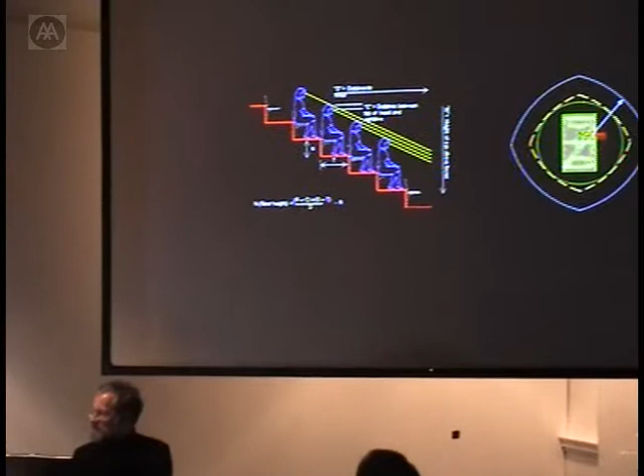And one of the first things I ever came across was a very simple little challenge: how high do you make the steps so everyone can see? Very, very easy thing. So I asked the partner in charge, there was I fresh out of college, and I thought he'll know what the answer is to this. And he said, oh, it's a big stand and you're quite a long way away, so they're about this high. Didn't really seem a very good approach to it, and you can imagine the embarrassment that you'd suffer if you got it wrong, not to mention all the court cases.

Fortunately, someone invented a nice programmable calculator, so I programmed out how to do it, and it seemed to work pretty well, I have to say. It actually worked them out for probably the first time anyone had actually done that particular.

Oh, that's very interesting. Complete blank screen. Oh, there we are. Very strange.

Anyway, after working it out on this programmable calculator and using it for major buildings, we're talking about seriously big buildings, I then did what most architects do about investing in design and technology and the process of design. I put my head in the sand for the next 25 years. As I say, the calculator had served its purpose, and I updated it all slightly in about 1989 when I went back to Lobb Sports Architects, and using MicroStation you could program simple things like how to draw a section of a stand, and it was basically you were putting in the parameters and it would draw them.

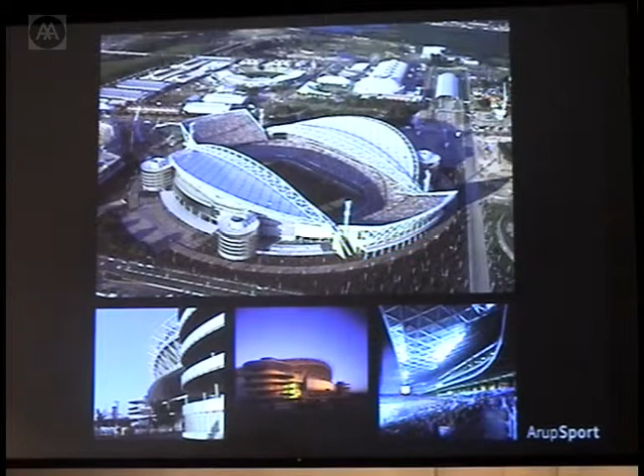Very, very straightforward, very, very easy, and at the same time discovered the benefits that working in 3D would create, not only for the process, but in the freedom that it gave one to design very complex forms. Stadium Australia you see here is probably quite unusual. The concept design, which won the first stage of the competition, was done by one person in 10 days, with 3 people to help for the final day. I suspect that won't be repeated for a fair time, that sort of approach.

So by the time I was involved as a consultant with Arup for the first time on the City of Manchester Stadium, I still enjoyed the overall process of design. You know, it's a thrilling building type, it's really exciting, plenty of enjoyment there. What isn't so enjoyable, and you'll find this about a lot of what you end up doing when you're working, is that there are a lot of things that are very repetitive, there are a lot of things that you can't do as well as you'd like to do them because you run out of time, and you can't necessarily go backwards and forwards to do them properly.

Now, stadium design, like all disciplines nowadays, is becoming very complex, it's very sophisticated, there's a lot that has to be taken into account. So the first task, obviously, is to start analysing those things that are going to give you the biggest benefit if you codify them, write your own software tools. And I've fixed, quite obviously, in the case of stadium design, on the basic geometry of viewing, the way you design a seating tier, the way you make sure you can see over the head in front, the way you make sure people can be close enough to the action. And the rules are actually quite straightforward, and they're easy to understand in this particular case.

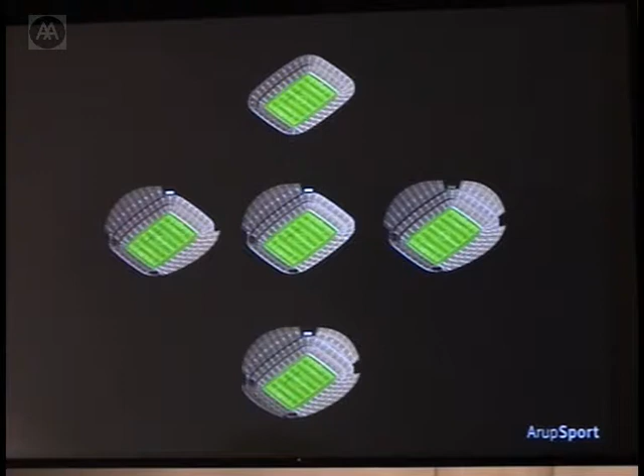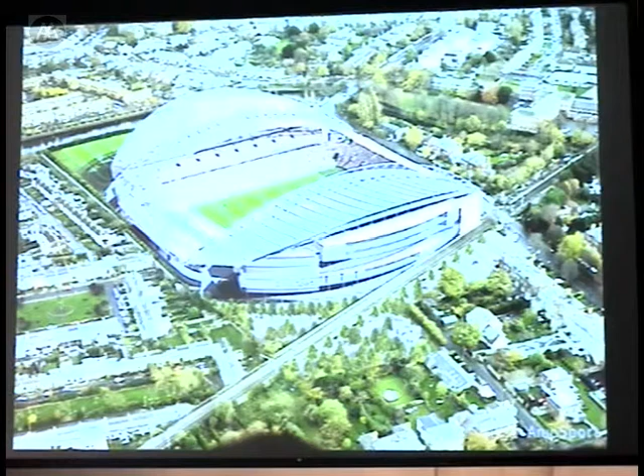Now, we progress beyond just doing the parametric design of bowls, because there are many other aspects that respond really well to being able to design the basic principles, codify the principles, and then create tools to build your design. In Beijing, for example, the complex bird nest structure of the roof and the external envelope, the very first stages were not done parametrically, but it was very quickly realized that it was such a difficult task to design this entire complex form without using parametric tools that we just had to go parametric. So we bought CATIA and we started off within Arup Sport a bit from scratch, and now it's all been done that way, and we're just waiting interestedly to see how far it goes through the manufacturing process. We're hoping that the subcontractors will actually have taken it on board and made it work for them as well. And overall, again, huge benefits.

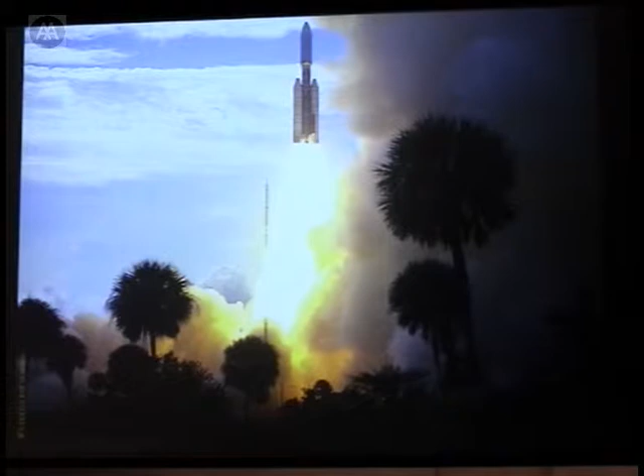I have to say I think I've been lucky in the particular field that I've ended up in. Those involved in it will realise quite rapidly that it's not rocket science for most of us. I suspect a couple at this table would have gone on well as rocket scientists, but for the rest of us, it's really fortunate that it isn't. And it's a field where even individuals can make a huge difference.

We are not at the stage where you had to be a giant corporation to benefit from this sort of approach. One individual can actually create tools that enable them to design stadia, as I have, or it doesn't matter really what. It could be the design of toilets. It sounds pretty mundane, but if you had to do an awful lot of them, why not work out what the principles are and create software that enables you to design those as well, more efficiently, more easily, and to examine more options and get better optimization.

It is, of course, and this is shared with all our businesses nowadays, a very competitive world. And so I have to say I dread to think what will happen to firms who don't follow this sort of route, because we found it gives us such a huge competitive advantage. In a few years' time, how will other people compete if they're not doing the same thing? But of course, it's no good just doing it then sitting on your laurels. We've got to constantly progress if we're going to remain successful.

What we need to do above all, I think, at this moment in time is extend the proportion of the design that's actually developed parametrically. As soon as we end up having to start making manual changes, we lose a lot of the power of these tools. So for instance, if we make manual changes here and the design has progressed to there and we want to change something, we very possibly have to go back and do all the manual changes again, which means we probably won't do it, and yet we'd have a much better building perhaps if we were able to do so. So our aim now is to spread the zone over which we can control everything parametrically as widely as possible.

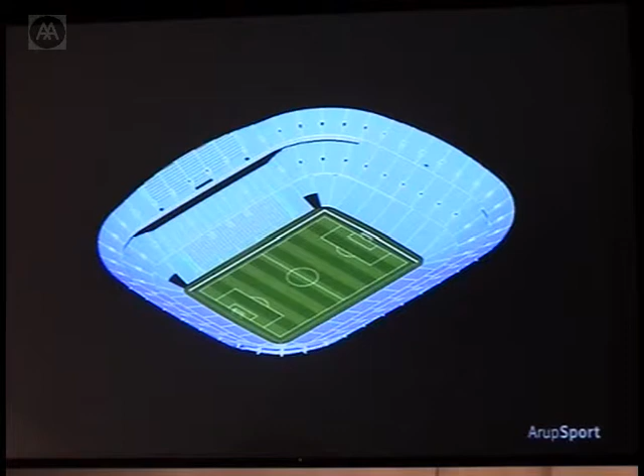This is actually the bowl for the new Allianz Arena in Munich. It's got 66,000 seats, I think it is. This was version 31 of 33. In fact, I think that it was finally 33 that got built. Imagine spending a month on each of those. Well, you wouldn't. It's quite simple. And here we have the reality, a slightly wide view of it. This is nearing completion, all designed parametrically.

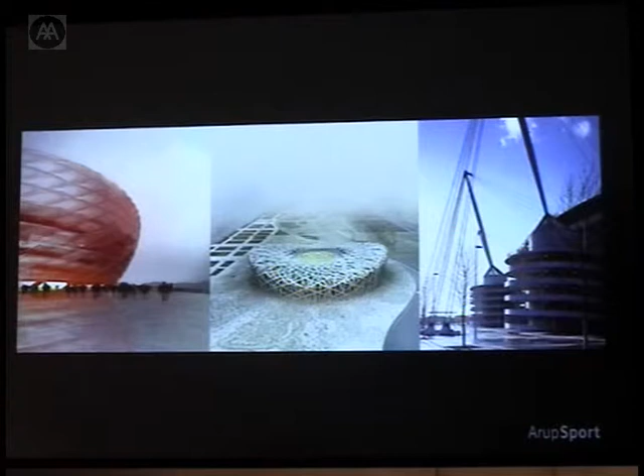So my dream is very straightforward. To be able to design a stadium in a day. All elements, all disciplines. And to do another one the next day, until we get the right one.

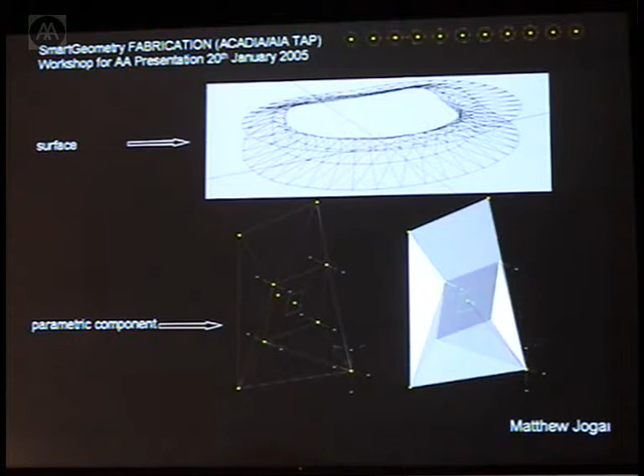Now let's have a look at some of the students' approach. Matthew Jogan from Yale started with a generative component which has got 4 root corners. And it's basically a set of fixed triangles which can deform themselves under a transformation. So you can see here how it deforms itself, and essentially what changes is the shape of the hole in the middle. But all the other components remain the same.

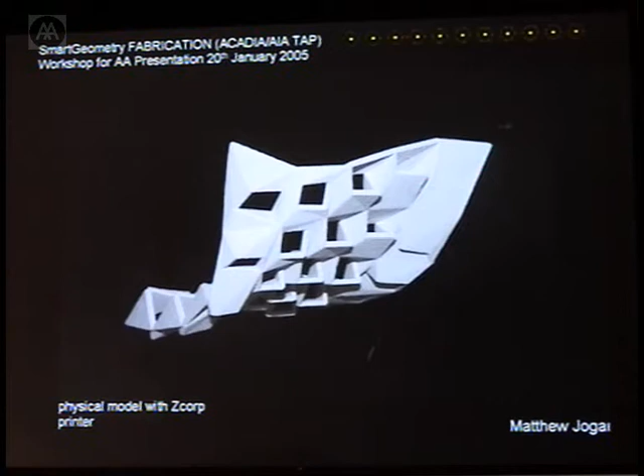And then you take that and you put it onto a design surface, in this case a B-spline surface, which you then dress up with these things. And of course they respond to the underlying geometry. So here you've got a piece of rather interesting geometry, which is essentially made out of 7 triangles which are dressed up. And of course, because we were doing it in a workshop in relation to fabrication, we also fabricated the components at the end.

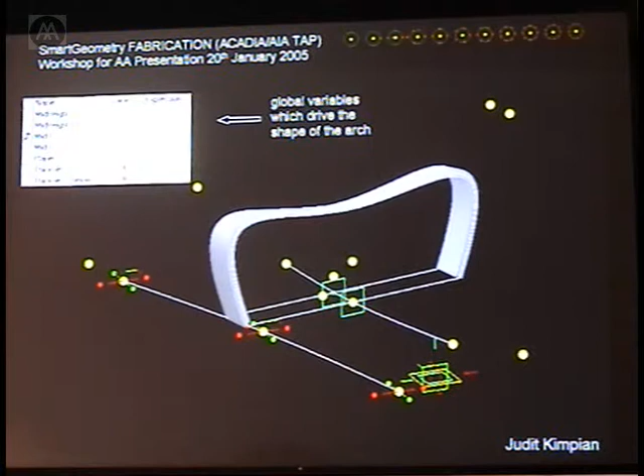Judit Kimpian, who I think is actually in the audience here, did a project that I think she said to me that she'd been working on for a long time and obsessed with for a long time. And that is this particular form. What this form does is that as you change parameters, you distort the form, so you have different types of layered objects which you can change the shape of by changing your parameters.

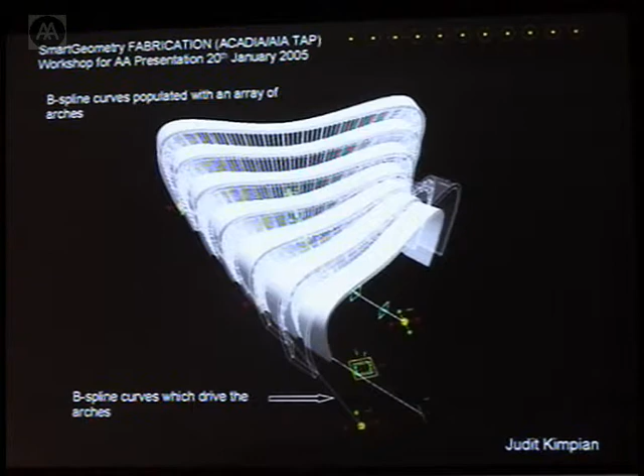But then, of course, the interesting thing is then to start to take those and array them out so that they obey rules which are given by things like the span and the fact that they each need to nestle into each other. And of course, as you move your B-spline curve around, the whole thing will distort itself and so on.

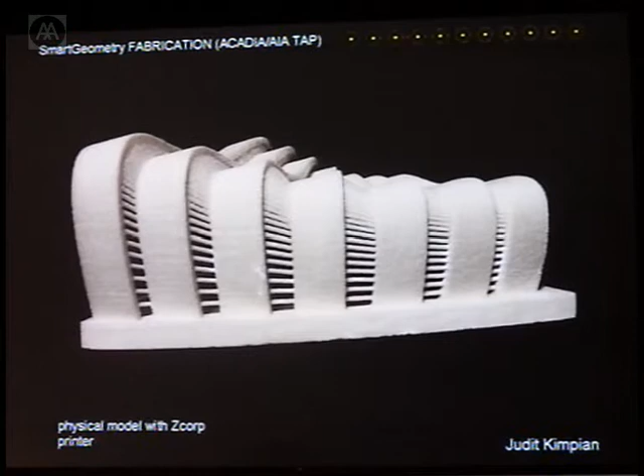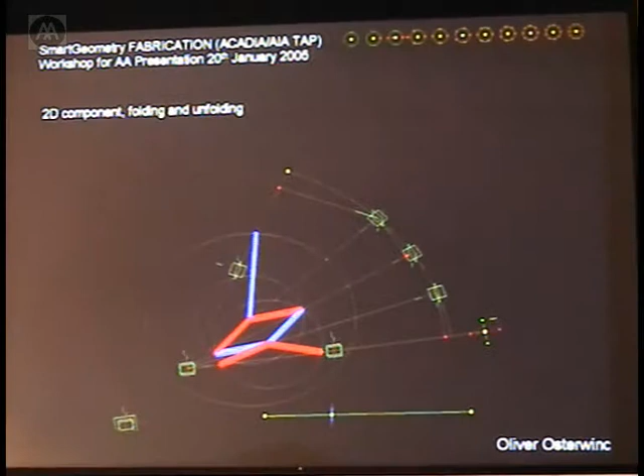Now, Oliver Osterwinc is really interesting because that's a different sort of problem. The Hoberman sphere, if you remember the Salt Lake City Winter Olympics, had a backdrop of a 2D Hoberman sphere, which was collapsed as the backdrop to the stage set. And what it does is it obviously moves, so this is the mechanism. Now, the interesting thing with parametric design is that something that is moving, which is essentially a mechanism, is trivially easily modeled in a parametric system. So it's a subset of parametric systems.

So here you take it and you collapse it inwards. You collapse it inwards again, and then you put it up into 3D, and of course then you get really quite interesting effects in 3D. Suddenly they're beginning to collapse themselves. And of course, in order to get all of this, what you do is you then cut it out to make sure that it actually works as a mechanism.

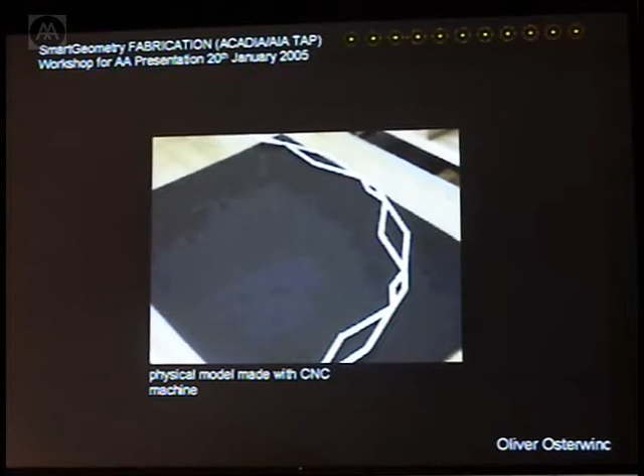Okay, and it just kind of reminded me of a project that we did a while back, which had an opening folding roof, which would have been quite fun to do. I think each one of those fins was going to be about 20 meters big or something. Whether it would have worked or not. The interesting fact is it was actually modeled quite simply as a circular object and then stretched in one dimension

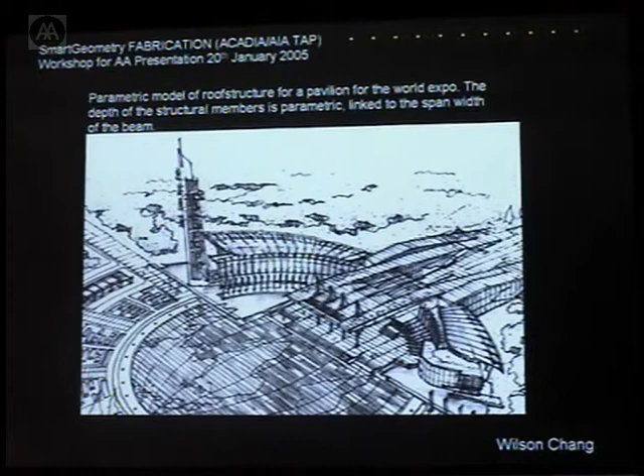to get the thing. This here is a Chinese gentleman who's working in Canada, who was doing a straightforward 3D parametric roof structure, not in itself, I think, in a terribly exciting form, but the nice thing about this sort of thing is that it integrates your manufacturing process, so all your cross-sections are laid out and they are laser cut straight from the 3D model. Change the 3D model, recut, re-erect it and reassemble it back to your form.

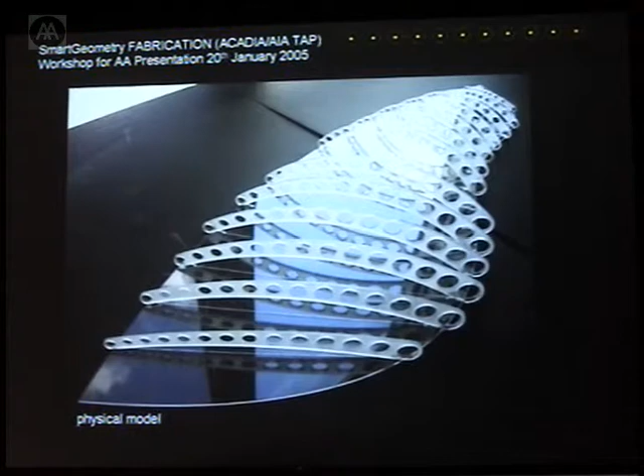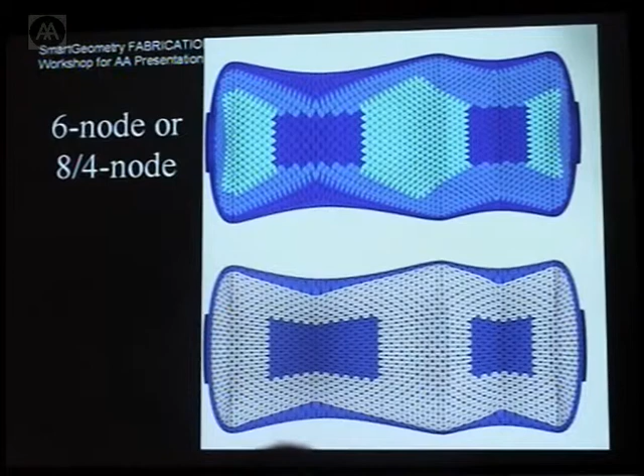Volker Müller and Rob Woodbury had a separate room, and they talked about architecture and more architectural type approaches. So Greg Lynn architects were there, and they often have this situation of having very curvy walls and objects like that. So what they do is build a system for extracting cross-sectional items so that you have different spanning objects. And this is the kind of situation where KPF has been using the same sort of things. Of course, things like how you triangulate the roof mesh and so on are very interesting and well worth exploring.

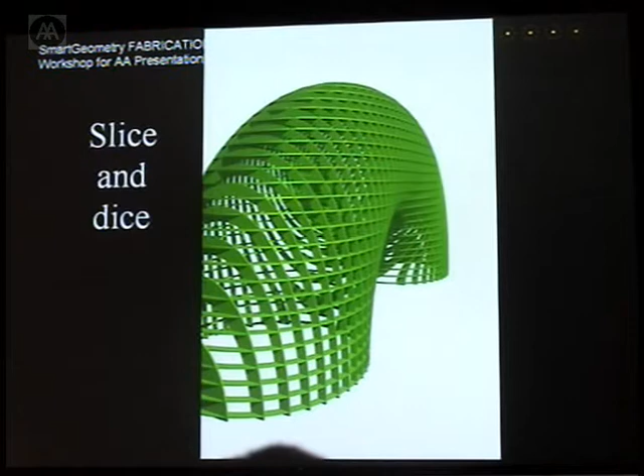And of course, you have the ordinary slice and dice thing where you just say, take a form, slice and dice, and there you are. And that's really very trivial and rather boring. I think everybody's done this slicing and dicing now.

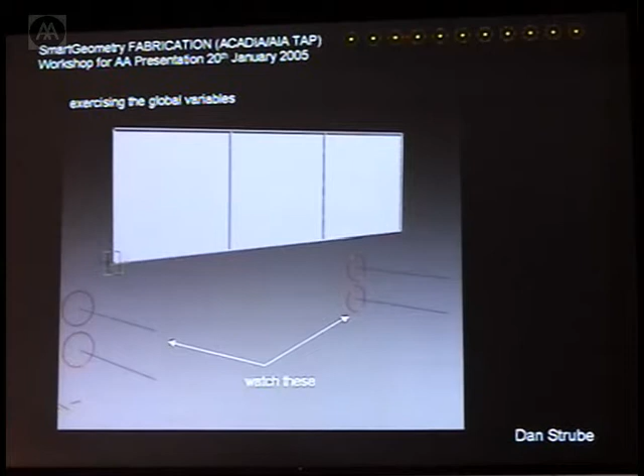Dan Strube was interesting. He had a truss that was deforming itself. And so he built a series of controls. So if you look at those global variables, you will see that those controls control the shape of the trusses at different ends of the object, so that you have a form that is gradually distorting and angling itself. His basic idea was that this was going to be used to respond to sunlight and weather conditions. And then, of course, what you do is you just dress it up, render it.

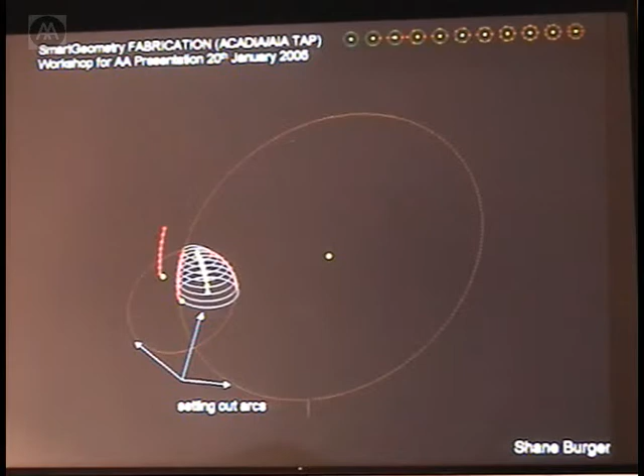Shane Burger is one of the competition, and they won the New York Times Metropolitan Interchange, and this was their basic geometry. They came up to the workshop. So we worked with our competitors as well in SmartGeometry Group. We're not exclusive. This looks like the GLA building, but as Hugh says, it ain't nothing like it. Its actual fundamental geometry is quite different. This is a series of inclined arcs in space, which are centered on the intersection of 2 arcs in space.

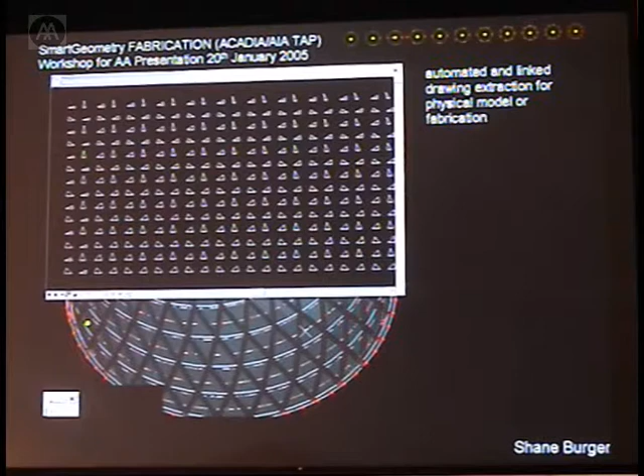And then you triangulate it. It has got a subset of triangulation, which is the triangulation of the glass, and of course you just lay them all out flat and they're all parametrically linked into the model, so when you change the model, all the layout changes. But the real reason they were doing this parametric model is they knew everything about the geometry before. That was relatively not trivial, but you could build it as a straightforward CAD model once you decided your 5 parameters. But what was problematic for them is the spiral ramp, the way the spiral ramp is going to junction into the space between those two structures. And that's really why they were exploring this.

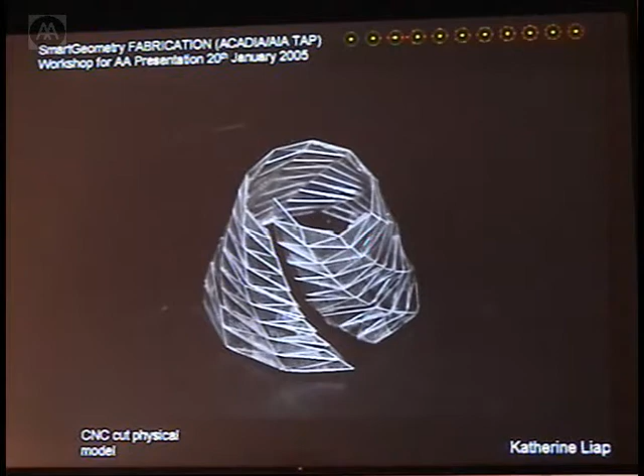Katherine Liapi was very interesting. She has been designing tensegrity structures, and basically she is working on providing a back-end entry into this. So what she was exploring was the formal methods of doing shapes that could be then dressed up with tensegrity structures. I'm speeding up now because I'm realizing I'm getting up to the end of my time.

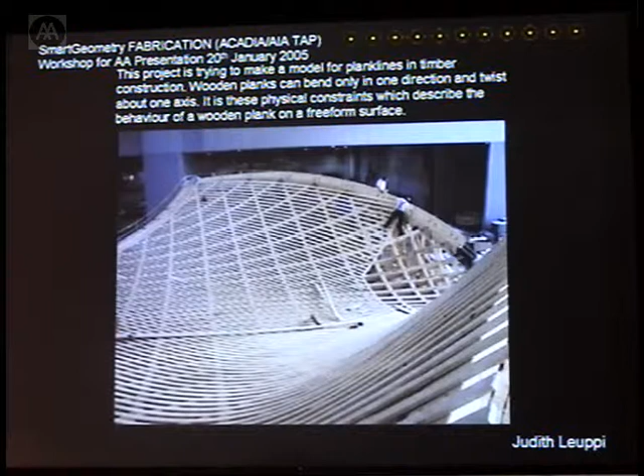Judith Leuppi from Arup, she has been into planking lines for some considerable time, and Bentley's helped to rewrite her planking routine. So it's now available inside Generative Components. So if you start with a double curved surface, and then this is the key item, if you take a plank and you bend it, because it bends unevenly around its 2 axes.

So when you put it on a curved surface, it is not going to take up the curvature you expect. It is not just the projection. It is in fact minimizing the normals, I think, kind of. But what it means is that after you built it, you then thicken it up and make it a plank. And you put it in the different directions and you have a look at it, see what it looks like.

And then, of course, you manufacture it. The real test, which Robert yet hasn't done, is to just cut them out and just stick them together at the junction points and see that it takes up the proper form. We're pretty confident it will work there.

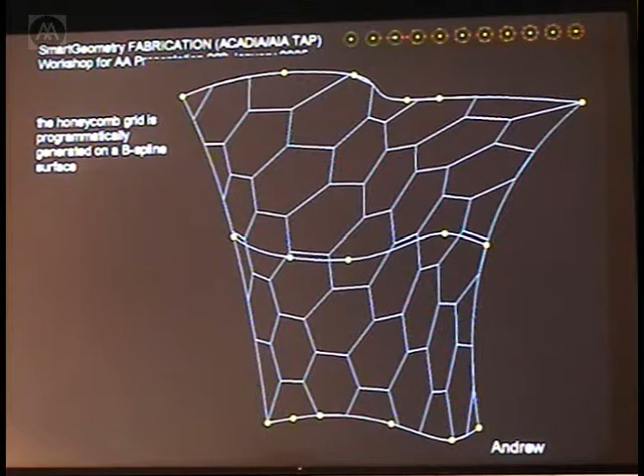Andrew Kudless, who is also here in the audience from the AA, he was exploring the fact that you can take code, existing code, and plug it into generative components in the back end. So he'd been building this, and I think he told us he went through 4 different softwares, Maya, Rhino, AutoCAD, and so on, in order to produce this. Whereas the nice, big advantage in generative components is it's all done in one single environment.

And of course, changing your parameter to have more honeycombs is not a big thing. Then you extrude the hexagonal grid, and after you've extruded it, you then lay it flat, and you cut it, and after you cut it, you glue it all together, and it will then automatically take up that particular form.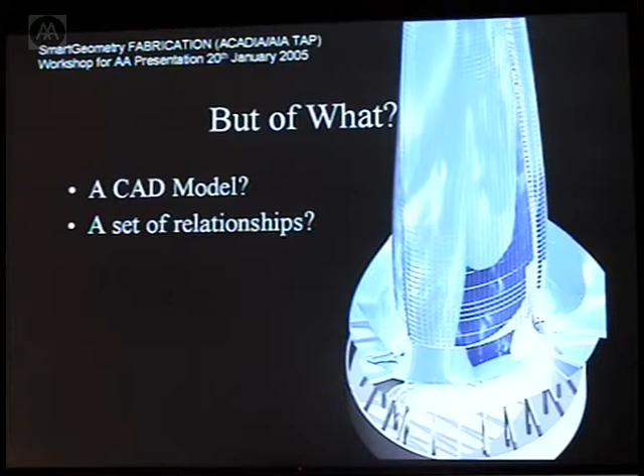This is where I think we're coming back to where parametrics really come in, which is that we're modeling relationships, not geometry. And modeling relationships, not geometry, is a skill that I think is going to need to be taught in schools and with architects. It is a vital thing that we have to do.

Okay, just finishing up. What we will do is we'll run another SmartGeometry event in November, and it will be in Cambridge in the UK, probably back to the Møller Centre, and we'll have a conference in London back here.

And what we're hoping then is to attract people, programmers and the like, also users of course, who are doing simulation type things, environmental simulation, that can feed back into the design of building systems. Because it's clearly important that performance is one of the issues that will drive form in the future. And we hope that GenerativeComponents will be a released product at that stage. And this is where I hand over to Robert with a minute to spare.

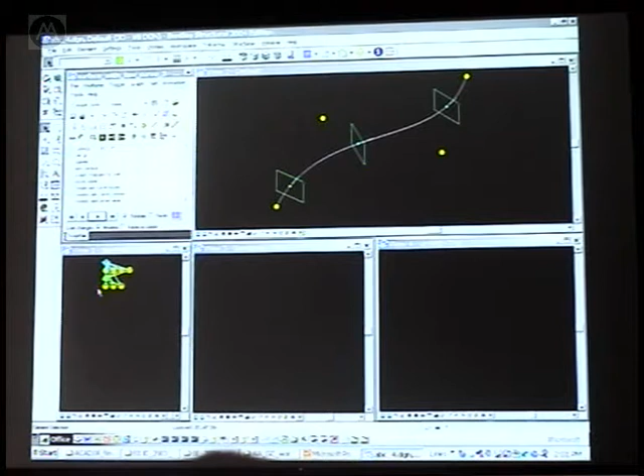So we're representing the relationships both spatially and geometrically and logically. So for example, I can pick up this point here and move it around, and I can move the planes on this curve. And all the data that I put down there is not just flat data. I'm not just snapping to something. I'm building relationships which are active, and which can be used to explore variation in design. Therefore, it's very important that I establish the relationships that are appropriate.

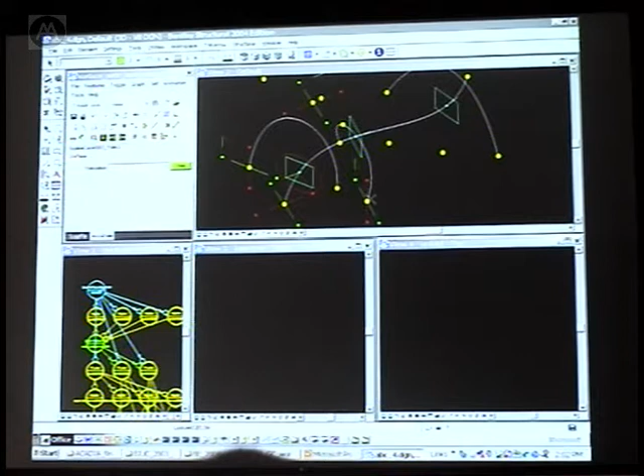So here I have a base coordinate system creating a set of points into a B-spline curve, and then a set of planes on those curves. So into those planes, I'm going to place some other points and other curves, so that, for example, I can pick up this point and move it on this curve, in this plane, and then pick up the plane and move it down the backbone spline. So I've got complete control over this system. Then I can put a surface through that and do various manipulations, for example.

One of the ways we want to explore design is through different paradigms of control. So, for example, it's pretty obvious that we can move something in the actual 3D model. But what I wanted to explore is the idea of creating other kinds of control systems, for example, to control the hump of this little saddle surface.

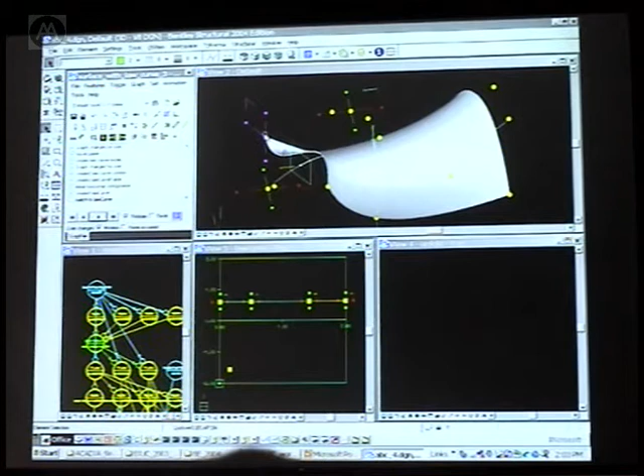So I'm going to create a law curve where the x-axis goes from 0 to 2, which is the length of this surface, and it goes from +2 to -2, which is like height, if you like. I'm going to put some points there, draw just a simple horizontal curve, and then switch over the control of this surface from the points in the three-dimensional model space to the law curve.

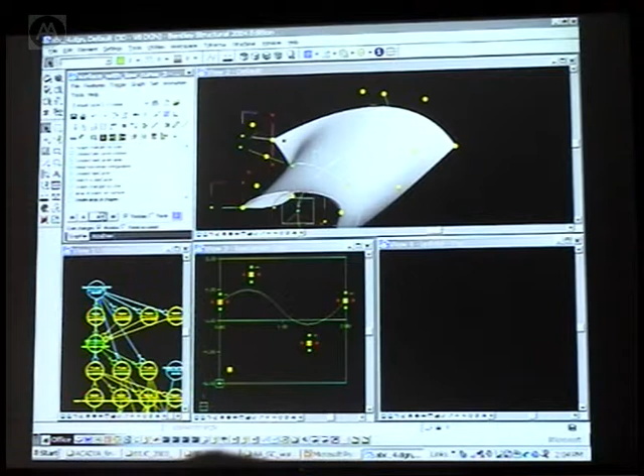So it initially starts off flat, and now I can go in here and change the law curve, and that surface can be manipulated. So in this particular case, I've got part of the controls, the height controls, being done by the law curve, but I've got other controls, like the lateral controls, being done in the three-dimensional model. I mean, this is just an example which I've built to show the principles. Of course, the whole idea is that one would adapt this to one's own particular needs.

Now I've arrayed a series of points, parametric points, on that surface. So, for example, the command to do that is just one symbolic node on this graph. Here are these points, and they're defined by a series in U and V. So create points from point 2 to point 8 in steps of 2. And of course it's actually produced all the data that's there.

So we're not going around individually putting down points or individually snapping to things. We're creating sets of objects which have relationships to other sets of objects, and where we're manipulating those relationships at a fairly high level. So now I'm going to switch off the surface. Shall we say this was on some roof, and I really wanted to have a beautiful doubly curved B-spline surface as the roof, but the client couldn't afford it or something, so I had to rationalize it.

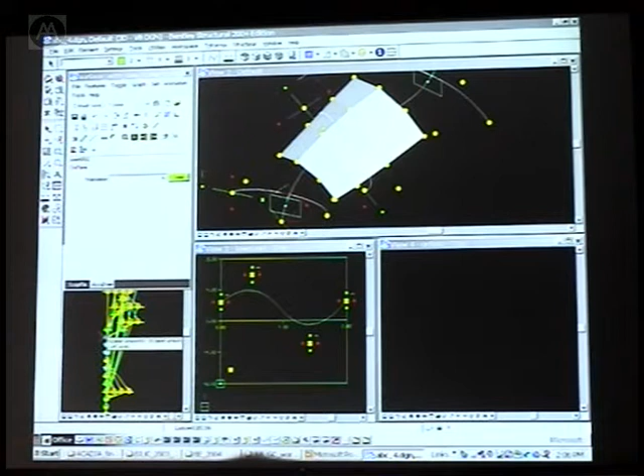So now I'm going to switch off the surface and instead put an array of shapes between those points. All those relationships are still maintained. If I move this controlling plane down the curve, if I change the underlying spline, for example, move that in, that is changing the control points, which is changing the surface, and we can see that the surface is highlighted in grey here, just to show that it's switched off. So the symbolic model is helping us navigate around both the data that is displayed and the data that isn't displayed. But even if the surface isn't displayed, all those relationships are being maintained.

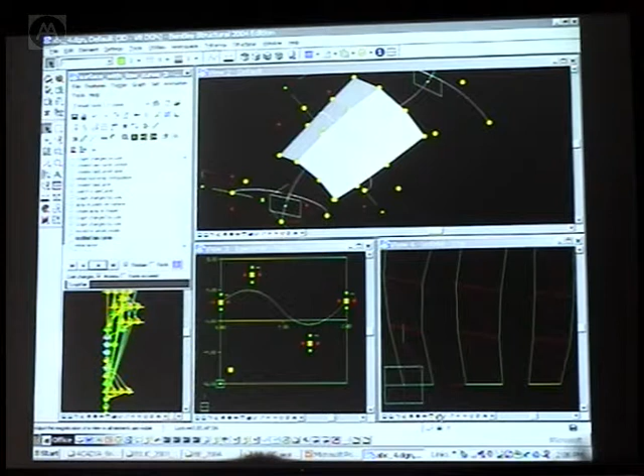So now I can create another model down here, and in that model I can actually unfold those shapes so that as I go back to change this design, change the underlying spline, that is rippling through, changing the surface, changing the points, changing the shapes, and changing the unfold. And of course we could send this to the laser cutter. Green would be the cutting power to cut the material, and red would just be scribing it. And then going back parametrically, we can modify the law curve, and then change the interval of the sampling of the surface and get a corresponding refinement of our manufacturing model.

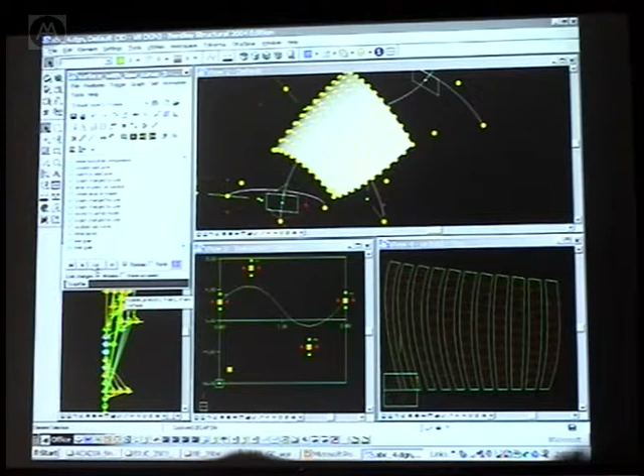So that just gives you a very quick slice through the whole process. We've got all these different representations, conventional three-dimensional representations. This is a sequence of design decisions. It's like a transactional model of design. This is a symbolic model showing the relationships. This is a law curve model controlling those relationships more graphically, and then the unfolded model, which is completely flat, as you can see. All those are interlinked and are active, and are all providing different either controls or feedback about the design process.

So that's what we presented to the MTech students. And so I just thought I'd run through a few slides from one of the projects of one of the students there, which has been pulled out more or less at random, which is about tiling, designing tiles, and then arraying them on a surface. In this case, so that the surface geometry is controlled by the overlap and disposition of the tiles.

And what I found interesting about this particular project is the student, having seen GenerativeComponents, not diving straight in, but very systematically creating some pencil and paper sketches and logic diagrams to explore alternative strategies and dismiss strategies. So you don't spend time going down blind alleys with the software. Very important.

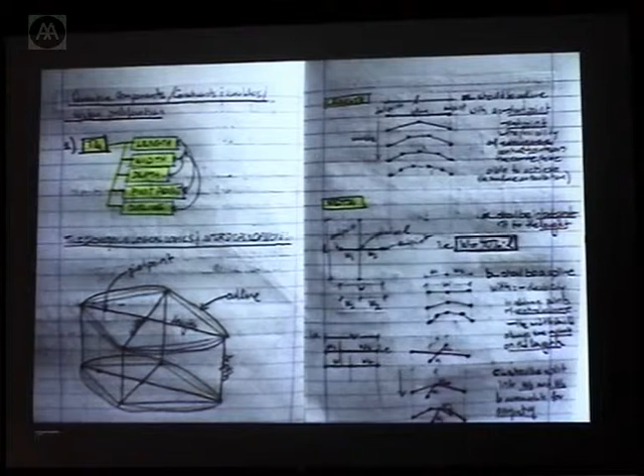And also establishing the naming convention of what is going to drive it: the length, the width, the depth, the pivot point, the outline, getting a very systematic approach before actually going to the computer. And so this was the model of the single tile that was produced. And obviously we built it up over various transactions.

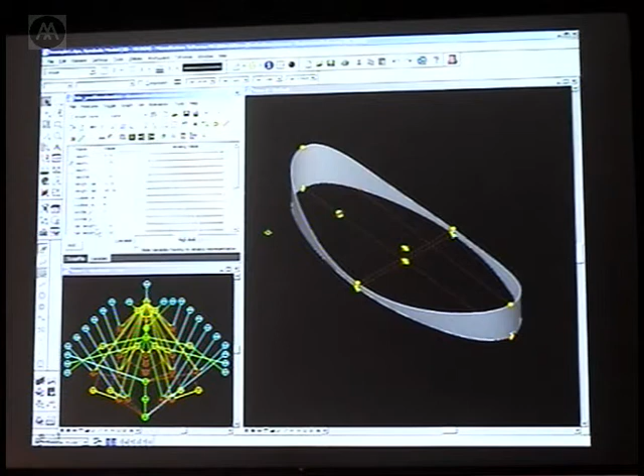And then we can link this to a set of slider controls. So we've got all these global variables like depths and lengths and outlines and profiles and various other tangency control systems. So essentially with this system, you're designing your own design tool. You're actually designing your interface. It's really magnificent work, considering we gave a tutorial on GenerativeComponents at the beginning of the week, to get to this kind of level of exploration.

So it maybe stimulates some more reflective comments. Of course, design is about intuition and spontaneity, but it's also about logic, and logic really requires some premeditation and some testing, if you like. And particularly what we want to test are things like relationships, both geometric relationships and algebraic relationships. For example, you might have some aspect ratio which is going to take one piece of geometry and inform another piece of geometry. And that essentially is leading on to some kind of configuration.

And with that configuration, we can wrap that configuration with controls. So you're not actually designing the form directly, you're designing the control system that will create not just one piece of form, but you're exercising it to look at variations in form so that you can discover new possibilities and validate those possibilities against different criteria.

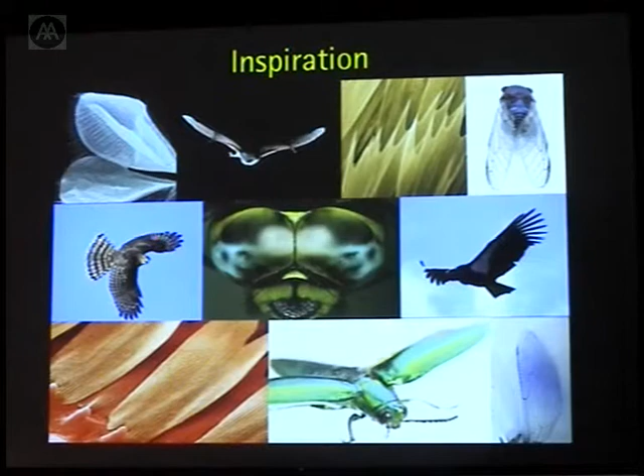So I'm going to talk about designer as tool builder. These are some examples. I mean, we always look for inspiration, and these are obviously some of the best designs on the planet. They were done by somebody who's been doing it for a very, very long time, even a lot longer than Norman.

And one of the things we found over the last few years is that what really helps is to try and build some attitudes of mind. So I've just listed a few that we find helpful. And what attitudes of mind do is they start to shape the way you see things. So one of the first ones is that we always like to try and see geometry as a mechanism.

The next one is that we like to see the sketch as a metaphor. And I mean a metaphor for the way you build tools. It goes like this. When you make a sketch, you make a mark, you say what the mark means, then you change the mark, and then you change your mind about what it means. Now, if you keep that in your head when you start to build a tool, and try and build a tool that works like that, it makes a very big difference.

So all our tools work the same way. It's very simple. They just say, go out, find all these things, and then do this with them. Going out, finding all these things, that's driving the file scanner. Then do this with them. You have to write or build rules of inference. So this is how you decide what to do and how to do it. And the rules of inference have to link directly to a function library. And a function library takes several years to evolve and build. But it's a very cumulative process.

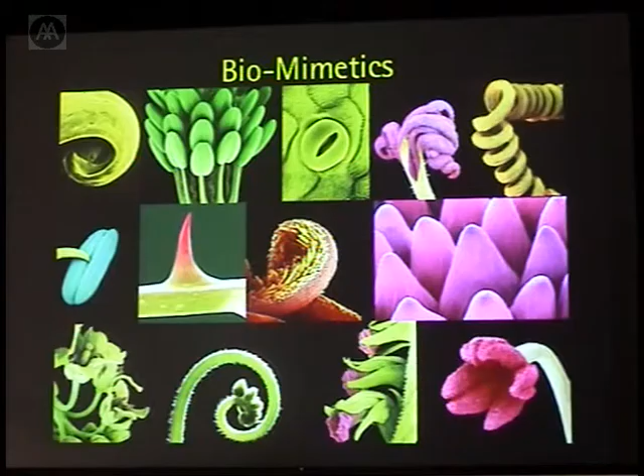So biomimetics is something that's very fashionable. But of course, a lot of people completely miss the point because they try to mimic biology. And the obvious mistake in this is that we should study the process in order to understand the product. You know, people get seduced by the look of the product and completely miss out on what they could learn from the process. Because all these forms are contextual, adaptive, they learn. And forms like this are very special because they carry on-board performance evaluation. So the form continuously adapts based on the feedback that it receives.

So again, another future for us is going to be geometry systems that link to analysis, so we can close this feedback loop. And it's really performance evaluation that leads to this kind of richness of form. And performance evaluation has to be much broader based. It has to cover spatial, sculptural, structural, and increasingly sustainable relationships.

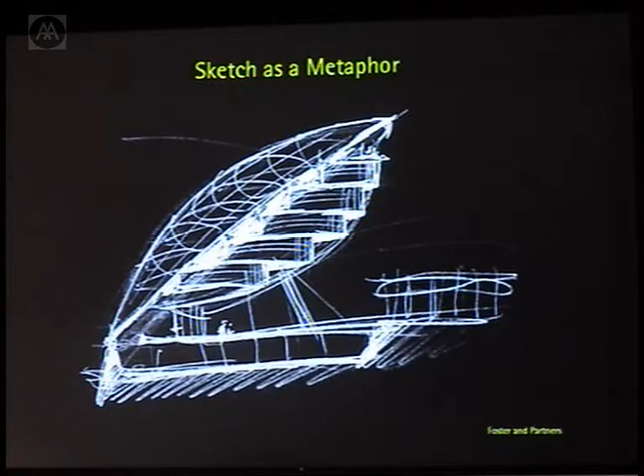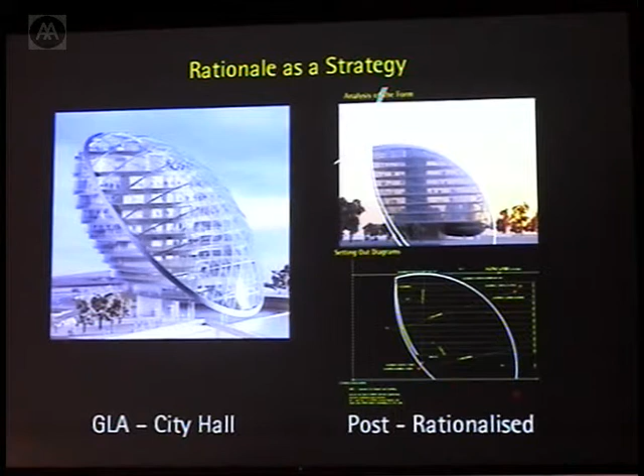Sketch as a metaphor, there are many, many ways of looking at that. Attitudes to rationale. Swiss Re is a good example of a building that was pre-rationalized. All the key ideas were worked out using cardboard and raw intellect. Everybody thinks that Swiss Re would never have been possible without computers. Well, computers were used to great effect in the implementation, not very much in the design. GLA is an example of a building that was post-rationalized. Having won the competition, we then had to make it work as a building and also make it deliverable.

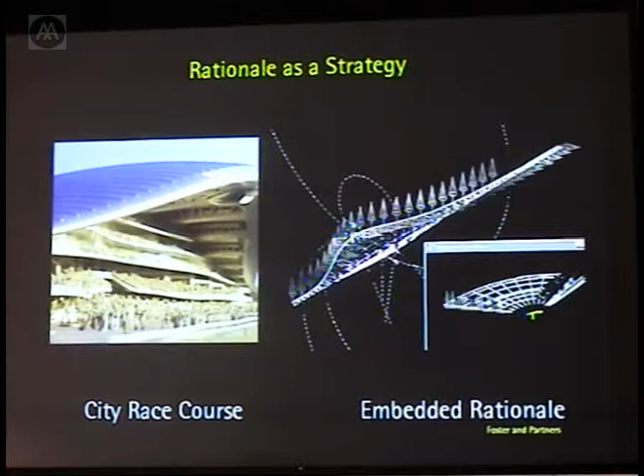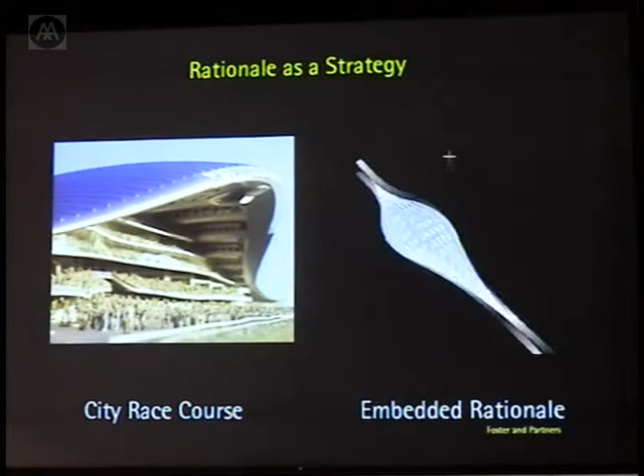But this is a single intelligent profile that carries all the information you need to create this form in all its detail. And it's very easy to modify the profile and the rules. And so this way we got very quickly into generative techniques, which was an area that we'd not really explored before. And we found we could explore them also at the detailed level.

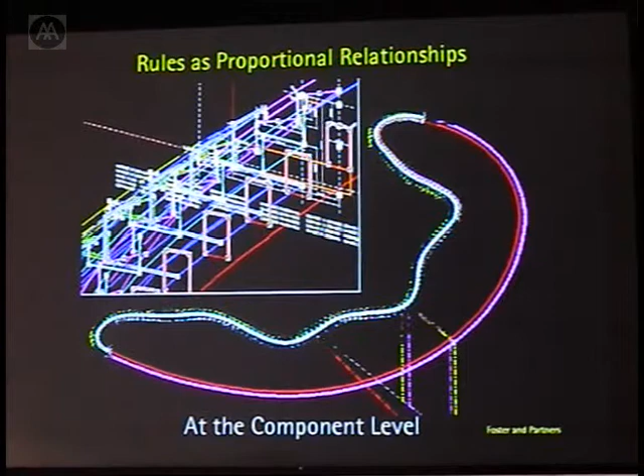So this is a little variational template attached to the setting out drawing you were just looking at. And it's going around the roof edge on the canopy and following a set of rules along the lines of go out, find all these things and do this with them. And this is what you end up with.

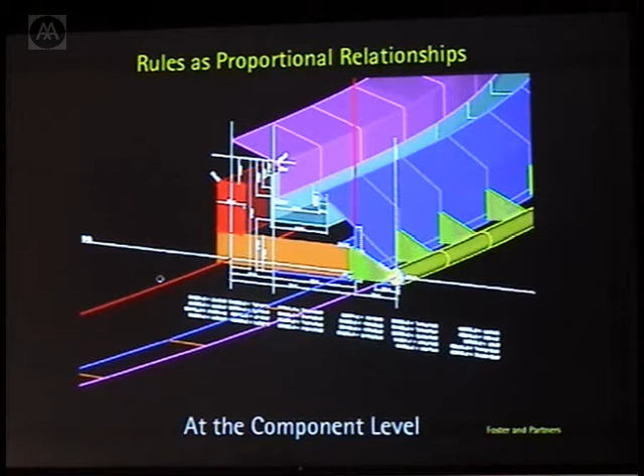And this whole thing is driven just from a few curves in a setting out drawing, and something that began as a little sketch on an architect's drawing board and then became a little associative parametric profile. Put the two together, and that's the kind of modeling result that we were able to get.

At about the same time, Robert was exploring with a forerunner to Generative Components. It was called Custom Objects. He was already looking at different types of expressions and relationships, and he had some fun with the Albion roof because it's a sine wave wrapped around a spiral.

But he wanted to be able to do things like have a parameter for the number of humps, or the phase angle of the humps, or the rock angle. So this really got us into a totally new area. And that's what's really encouraging us to try and play architecture as a team game with computers as amplifiers of the intellect. So I'm going to show you a little bit about a project, West Kowloon in Hong Kong.

And just before I start, I'd like to give thanks to the team who produced a lot of the work I can show you. This one, let's fire this one up.

West Kowloon in Hong Kong, we won a competition for a master plan, and then the project went away. We thought that's the last of that, and then suddenly it came back in a new version where we had to go into a new competition with a serious proposal of how to build it. So that's what we've been working on for a lot of the past year. It's called the Great Canopy. So how do we actually start this process?

We had a conversation with the engineers who said the trouble with architects is that they play around with the shape, and then when they finish, they pass it to us. And when we engineer it and make it work, we always feel if we just had a little bit more curvature in the right places, it would have made a world of difference, because the structure would have worked better, the steel would have been lighter, the spaces would have been more generous, and the form would have been more elegant. So, how do we cut through this loop?

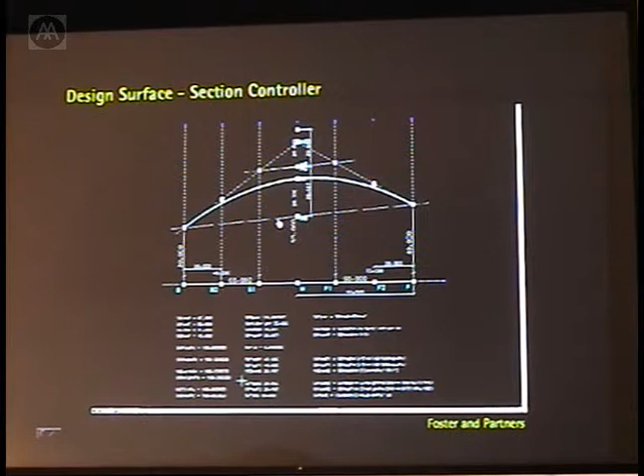So as a result of that discussion, we made this little parametric template. Now, you can see here some control points sitting on an A-frame. And those control points are all you need to produce all the curves that you just saw. But the curves are not created by modifying the control points. The curves are made simply by changing a few parameters. And so at this point, I'd like to go into a GC version of that.

Slightly out of sequence, doesn't matter. This one actually is showing GC in action, trying to generate in a controllable fashion the geometry for that canopy. So we place some base points, place some of our magic profiles. Now these are all the same profile, but this one knows how to be an end condition, this one knows how to be a saddle. These are all standard arches, and this one at the tail knows how to be an end condition.

So onto those, we start to place surfaces. So you can see here, this row are the front points, this row is the back points, this row are the controllers, and here two surfaces have gone on to create the head. Another three surfaces for the body, another two for the tail.

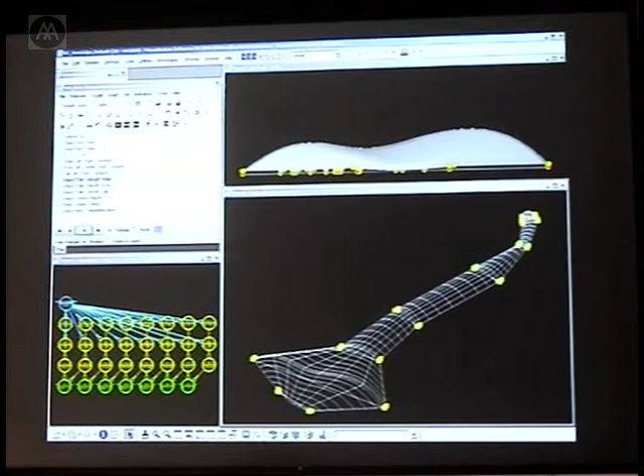Now, it looks pretty ugly and unformed, but all we have to do is pull out the tangent controllers, and that effectively inflates the head. Do the same for the body, and then the same for the tail. So these are very easy controllers, which are also smoothing out all the edge curves and redistributing the parameterization in the surface. So the next thing is we adjust the control heights, and up she pops.

Now, these control heights use the same tangent controllers to smooth out the 3D edge curve. And this is the hardest thing in the world, especially when it's 1.5 kilometers long. And always when you get the long oblique view, you will know if it's not been properly controlled. You'll see every little wrinkle.

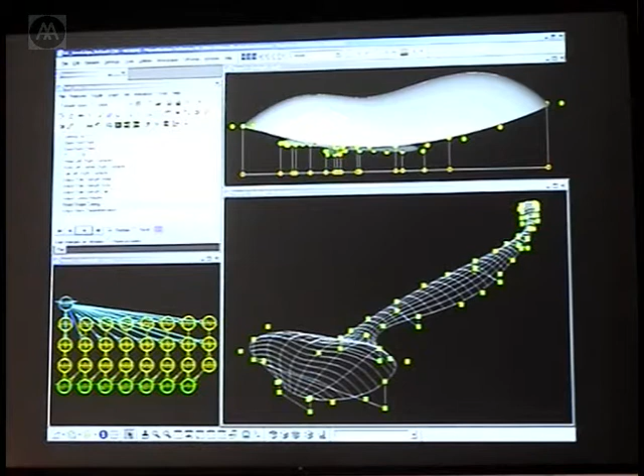So then we start to do some head shape tuning. And obviously it's too inflated at the moment, so a couple of parameters correct that. And then we want to have a look at the parameterization in the neck area, where there's something not working. You can see the way the flow lines are getting very contorted going through the neck. So how to fix this?

Most parametric systems, they don't have any way of actually controlling parameterization on a surface. So what we're able to do is create that effect. So you see the flow lines instantly smooth out. If you look at it as a surface, that's how it was. That's how it is when it's tuned. And the trick is playing off a combination of two parameters. So I'm just going to show you a little bit about what that system does and what the parameters are.

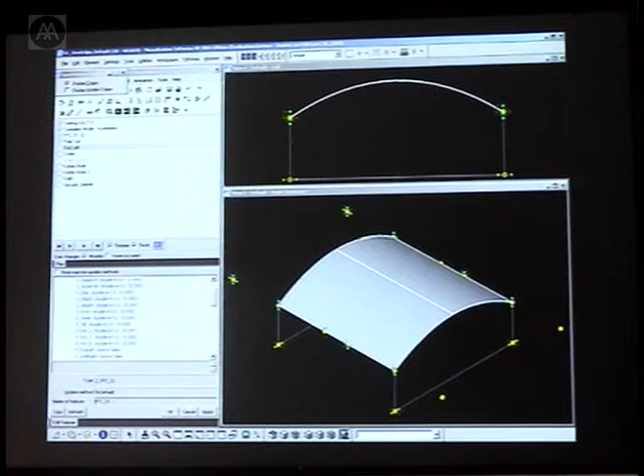So a standard controller looks just like an arch or a shed. And so when we put the proportional controls on, we can do what the engineers want us to do, which is to make it parabolic, because that's Gaudi's hanging chain, the most efficient structure. But often designers will actually want to go for an arc solution, so that's another parameter. Now the only parameters I've changed doing that have popped up in this window here. I've just put a variable from 0 to 1 in both those cases.

Now that is going to an ellipse configuration, the same variable has gone to 2. And suddenly I decided to break some rules, so what I've done here is push a depth factor down to 1. Now all these parameters have a default 0 to 1 range, but 0 underneath it has a hard-coded, sensible, safe default. So that's the magic. So we take behavior which is sensible and useful to us, stick it in as the default, and then put an override control on top of it.

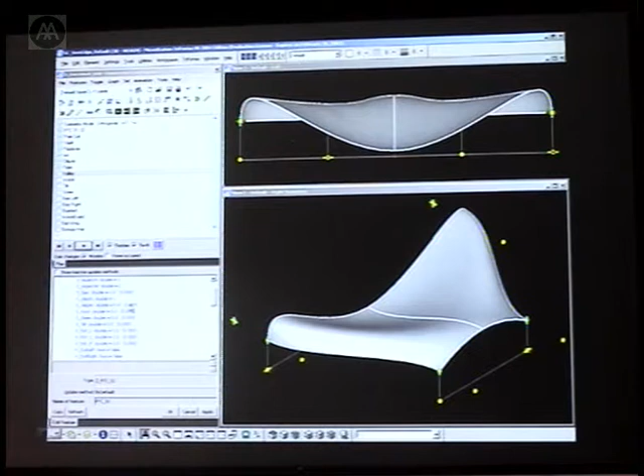So people with no experience of the tool can jump in and start to play from a sensible starting position. And when they go off the rails, all they have to do is put the parameter back to 0 and they're back in familiar territory. So now let's exercise it and go into a little bit of unfamiliar territory. So that's kind of getting interesting, because this tool allows you to talk to any designer in any field, you know, product design. I mean, this is probably talking to Madonna's dress designer.

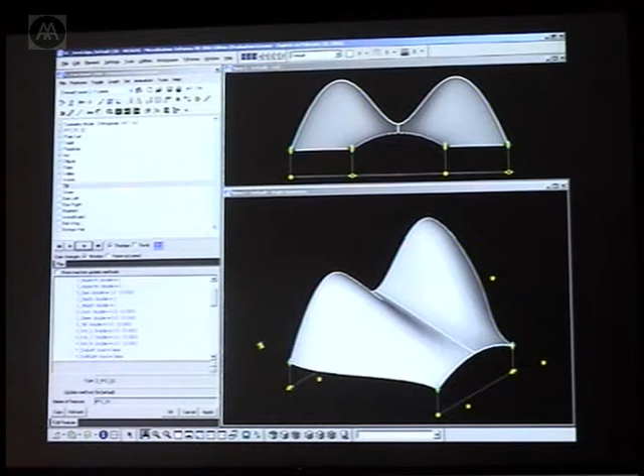And of course, I'm always told that the problem with this is, if you don't want to get into this kind of references, avoid symmetry. So here we go, asymmetric. Now, the asymmetric is a tilt value of 0.5. What we're putting in now is a skew value of 0.5, which is working in the same direction as the tilt. What we do now is put in some bias, which is also working in the same direction. And then for fun, we can play them against each other. So that is working bias against skew.

So these are plain English terms that, as soon as you click it, put a value in, you'll see what it does. And so what I'm trying to get across to you is tool building as an exercise in exploration and communication and discovery. So then, talking to other types of designers, this kind of reminded me of the Bluebird, that wonderful thing used to flash across Coniston Lake.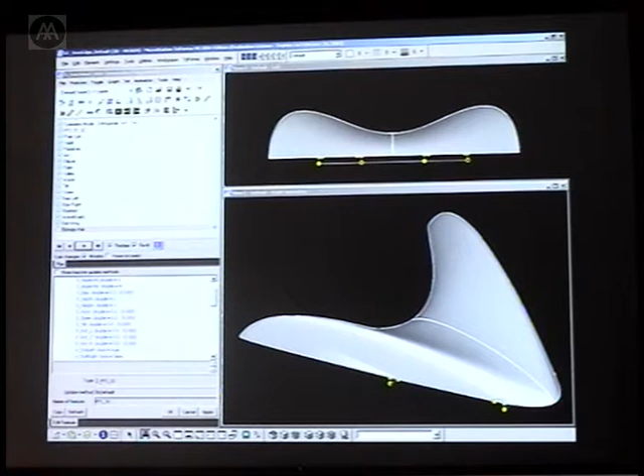This one is more what I use talking to my boys about waveboards. This one is kind of like a bat wing. If we just go back to the simple shed, all the shapes you've shown have come from the same configuration. There are 4 poles by 5 poles, that's all there is to it. And you don't have to ever worry about parameterization or meshing.

Now, it'll also do this, which is put on an edge condition. So you get a dome. And a dome with a perfect parameterization. But I've only got 4 base points, so if I just move them, I've bent it into a kidney bean. If I put a rock percentage in, I've inflated one end.

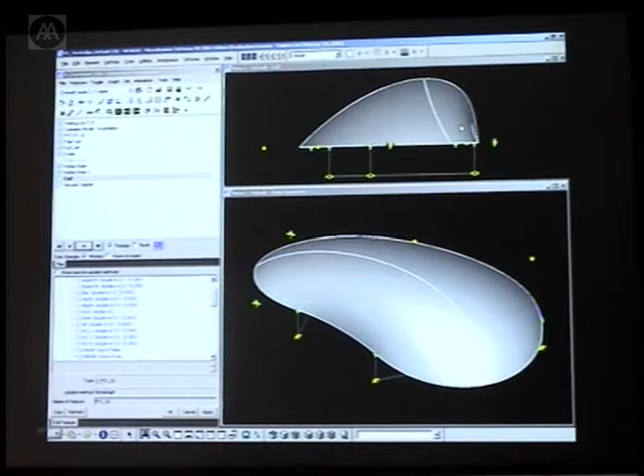And now if you see, what's happened is I decided to play with the edge condition. So we're starting to actually get curvature into the edge and a much richer form, more shell-like. And this one is really fun. This reminds me of a vacuum cleaner. But you know, the same form has come from the default shed that you just saw. That's the form from underneath.

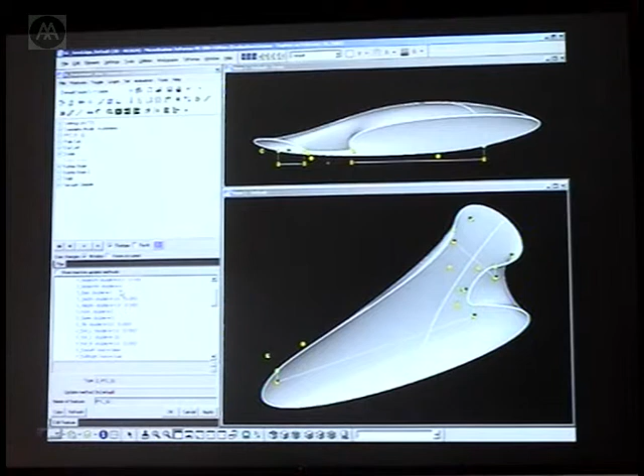If you look at my parameter list, most of them are still zeros. I put a fairly severe aspect ratio of 6. You know, so this is a thing you can break. The defaults are 0 to 1, but you can exceed it.

And this one I really love because I applied a constraint, a symmetry constraint. So then, just to see if I could break it, like Alice in Wonderland, I stepped through the mirror and I dragged a point across the symmetry line, and the whole form suddenly inverted. And you're looking at it from underneath here.

So this is a single surface that started as a shed or a vault. It's now become a self-intersecting surface, which is complete and continuous, which has all kinds of very interesting spatial, sculptural, structural possibilities. That's another view of it.

And yeah, I'm a great believer that a lot of the best things happen by accident. But the point is, this is a very happy accident, which is repeatable, because it's just stored in a simple parameter set. So any of the things you've just seen can be a starting point for a new voyage of exploration.

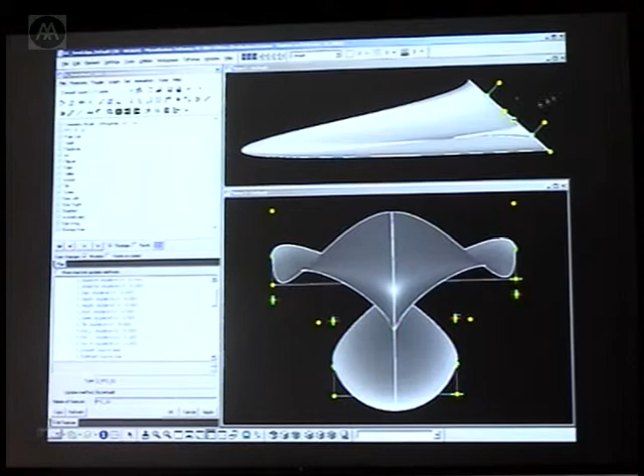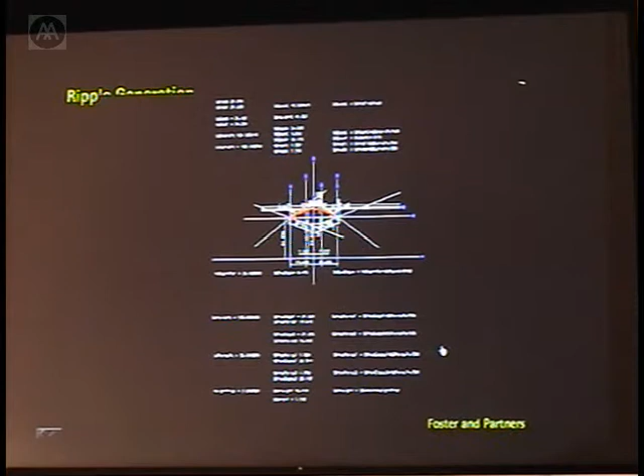So, tool builders. So these are two little tools. You see them sitting down here, and one of them is controlling cross-section, and the other is controlling long section. The cross-section is variational and parametric. The long section is simply law curves. So you can sketch any kind of transition just as you would in an animation interface, and it tells these clever little chaps what to do as they get placed.

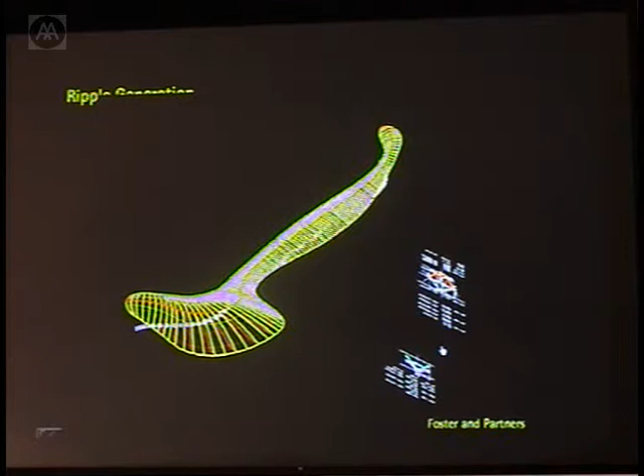So they're reading from the curves in the surfaces that we just generated with the surface tool. But they're now placing real components down on there. And they can place whatever you like. So at the moment, they're just placing simple beams. And this is the way we started out. So that system is tracking the center line, putting coordinates out, taking intersections off the edge curves, using that to extract points, which it passes to the clever little tools here.

And so it ends up in a surface, which looks pretty good from the top. But the real surprise and delight is, like a shell, when you turn it over to see what's underneath, because it's generated this wonderful ripple surface. And the ripple surface was such a surprise and delight. So we charged off with great enthusiasm, exploring this idea of the ripple surface. And it has a very useful construction logic too.

So here's some options generated from the ripple surface. We explored changing direction, different ways to get the structure to work more efficiently. This is a ripple surface, which is a throw a stone in a pond version. Different ways of doing that, looking at what happens when the ripples collide, looking what happens when you try and keep the direction going, but you still need to split the span. I mean, these are massive spans.

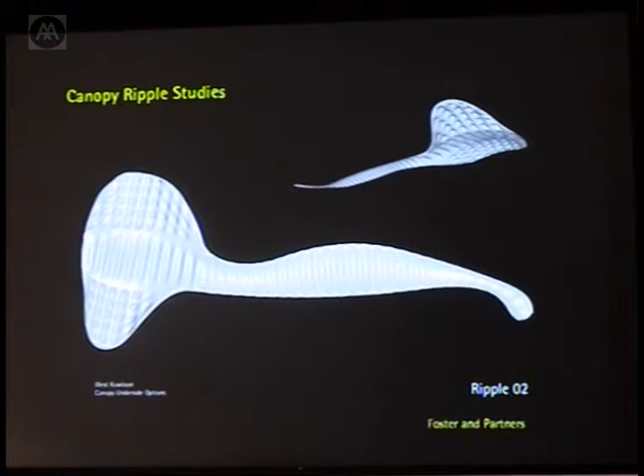Finally saying, well, what if we don't like the change of direction, have a portion that's bidirectional, so it becomes dimpled like a golf ball. So we had a lot of fun with those, and then suddenly design team decided, no, we're not going there. It was fun while it lasted.

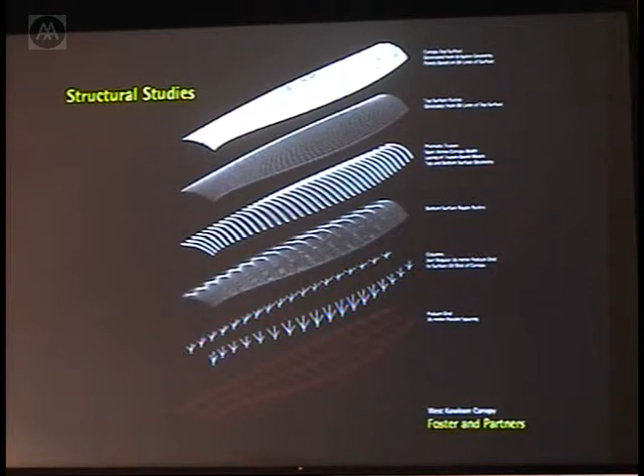So this now looks at ways of getting this roof to work better. And initially, of course, conventional solutions like beams, trusses, tree columns, all the things that you might imagine. And suddenly it was, no, it has to be one thing, one system. So, of course, the only really thing left to us was to try a space frame, which we resisted.

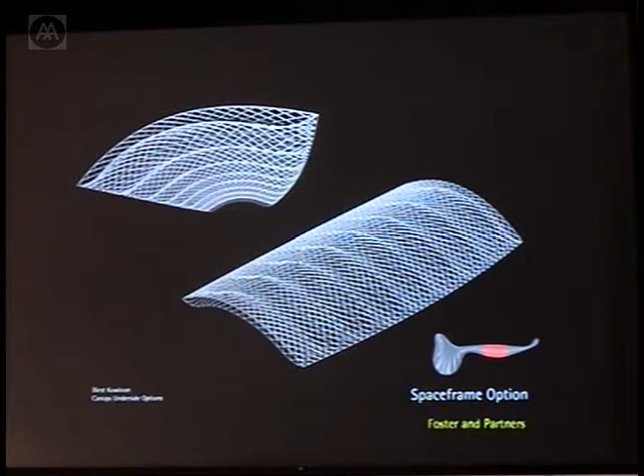What we found is that by doing an unconventional space frame on a diagrid and letting it follow the ripple surface, we got this wonderful basket weave effect, which was quite delightful, but people said, well, you'd never build that. So we were still looking for a way of making a space frame more readable, because they are such redundant and really confusing and quite ugly things to look at.

So this was looking at ways of playing an orthogonal against a lacing against a diagrid. And so we're still just playing these games between two design surfaces that know how to parameterize themselves, and then after that it's just stitching code. It's really like having a giant loom, and you can just put different knitting patterns into it. And these are some of the results.

And you can see the beauty of playing orthogonal against diagrid in the same surface is it's not a space frame anymore. It's like intersecting diagonal lattices. But suddenly, they also have a little pyramid that allows the rotation to the orthogonal on the upper surface.

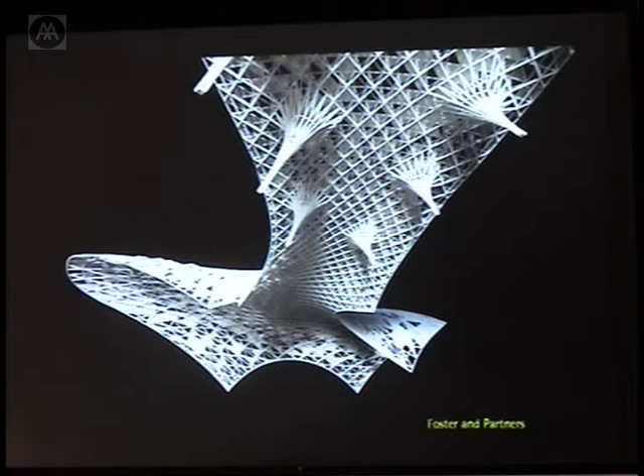And the other real magic was the supporting structure, because this came straight from Norman. The only thing that will look sensible with this structure is if the supports grow down from the roof like stalactites. He said it just has to be the same thing. So this was his sketch, and then this was how to actually make this idea work.

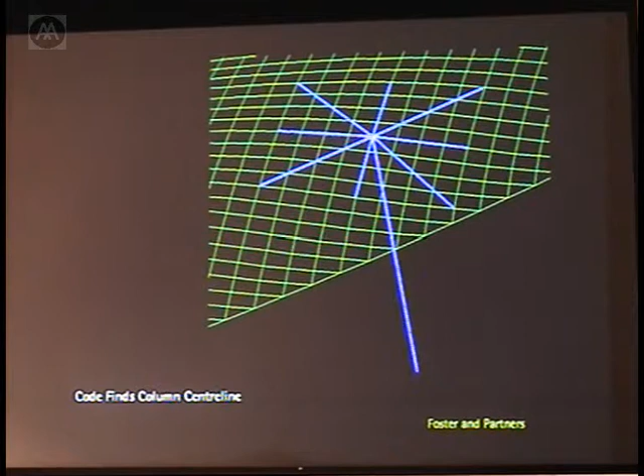And so you have to find a column location, and the code is actually the same as the roof, but it just knows how to reduce and limit itself. So it first of all has to find where's the column location, then it has to find the node distribution, then it has to decide where to set out from. Now you can see these are rules that you can follow wherever you place a column, whatever its geometry is doing, because there are no dimensions, there are no coordinates, it's all proportional.

So then we define the curvature of the stalactite. Then we have to drop depth sounding lines down, which we can subdivide so that we can get a system of gradually rotating planes which will define the reduction system. The planes then intersect the original curves and you get two little reduction surfaces. So the original code knows how to play between two surfaces. So now we've got surfaces that know how to reduce.

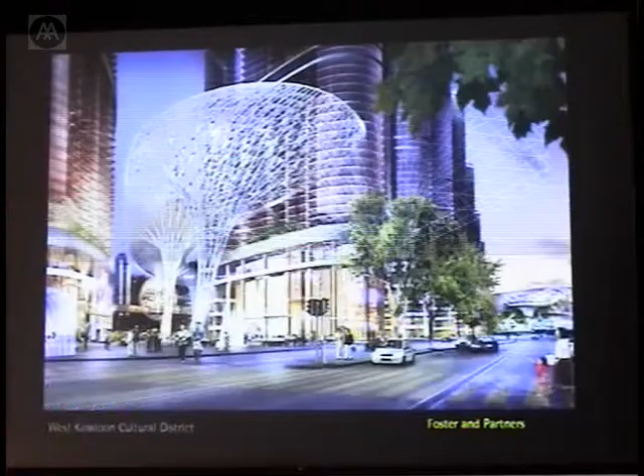And because they're NURBS surfaces, they have perfect parameterization that we can use to place nodes on. So we now have a knitting pattern, if you like, that can feed into the same code and produce these wonderful objects. This is showing the entrance to the Great Canopy, and you actually enter through the dragon's tail, which is quite an amusing idea.

And because there's so much curvature, you only need a single support, which is wonderful. And then when it gets into the main body, it actually becomes a diagonal stepping system. And of course, on top of that, you have panelization.

So the canopy is a living thing which modifies a very adverse climate. But you're always aware of the climate, so it doesn't seek to exclude it, it just filters it. So this is a whole other story about what the canopy does and how it works. But you know, the idea is, it's a similar effect to dappled sunlight through a tree.

So that's what it looks like. This is what it does. And so anything that happens under that canopy is going through this rich natural experience of the transitions. So Lars said, all I have to do is end up with a fireworks display. So there it is.

There's a little postscript to that, because I quite like these kind of metaphor things. And the last one I would add to it is try to see the platform as a playground. And when I say platform, I mean a development platform where we as designers can invite anyone to play. And we hope and believe that GC is going to be that platform. You know, that's why we're here, that's why we're involved with the AA, that's why we're trying to bring together practice, education and research. So, platform as a playground.